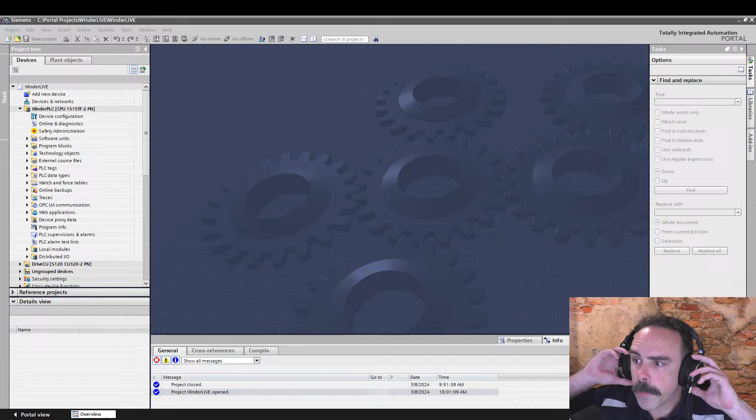So let's get going on TIA Portal. We're going to start with our project that we started a couple weeks ago, our Winder project, and use that as a jump off point. And my face is in the wrong place, there, that's a little better. So this is our Winder live project. We're going to start from this, and we're going to add in some technology objects.

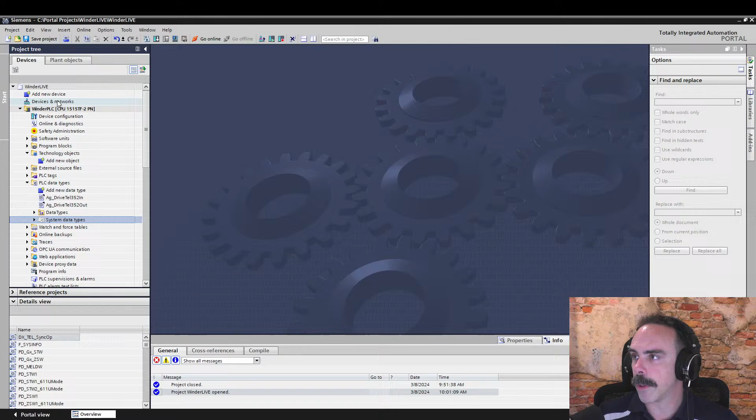Actually, first thing, let's just do this. Let's see if we can totally mess this up. I want to go to properties here, because I want to change these to servo, and then change these drive telegrams, because we're not really going to be using any of the stuff. This is just our free telegram, and 103 is not available, like I just talked about ad nauseum.

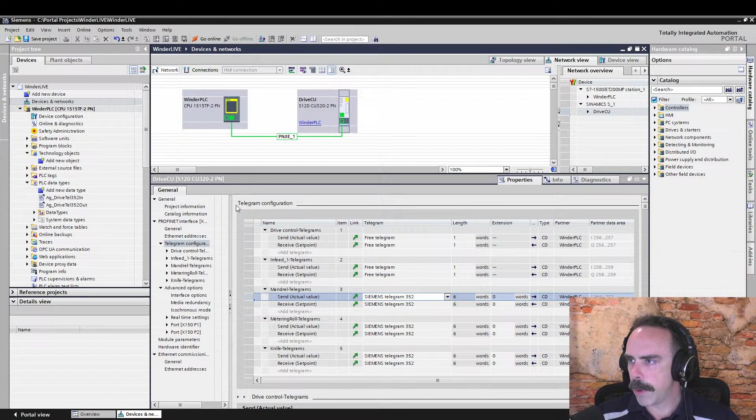So what we're going to do is go up to device view, and we have to go to these individual devices. So click in this grayed out area. The dark gray means it's fully configured. If it's light gray like this, it means there's something that's not quite configured.

So I'm going to change this to high dynamic servo for all of these, and it'll pop up this little dialog box that says it will delete all additional components and reset the parameters. So we're going to go through and real quick set this up all in servo. Now, one thing to note is that

Yeah, so measure, that's the thing, so measure twice, cut once. He's actually close to my heart. He's my replacement at Wesco.

So he is asking whether or not these data types are part of a Siemens library. They are actually built into Portal. You just have to know how to access them, and that's what we're going to do. Once you know the telegram that you're using, there's a certain thing that you can type in, and it just works. And it'll actually import them into these system data types here automatically.

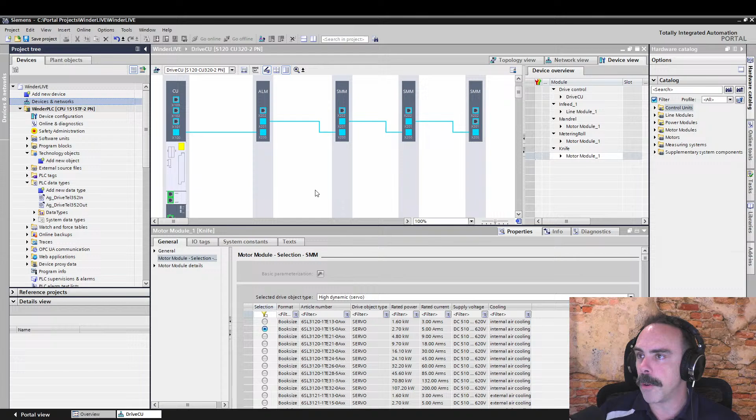So last thing I'm going to talk about is the hardware, then I'm just going to blow through this hardware real quick. These control units can control up to 6 vector or 6 servo drives. No matter what, 6 is kind of your limit. You can do 12 volts per hertz drives on them. But the problem is you can't mix and match servo and vector.

Save live. So not sure what the question is. Ali Reza. Is this the Ali Reza? Ali Reza Firouzja for all of you chess people out there.

Are you asking whether or not you can save what is online, kind of do an upload? If that's your question, yeah, we could talk about that.

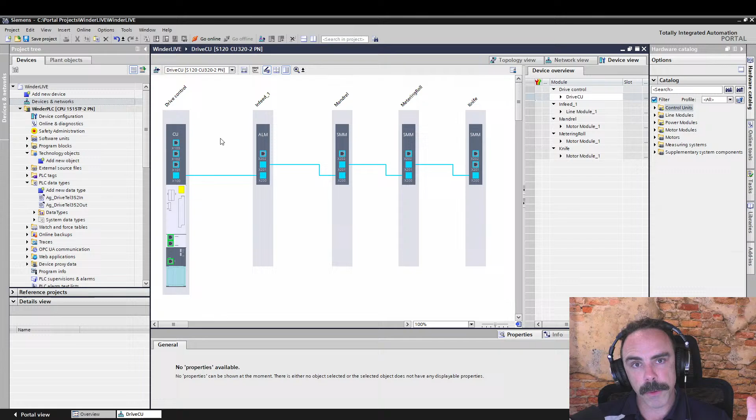But one thing I was wanting to say: mixing and matching servo and vector drives isn't allowed on a single control unit. So a single CU320 has to either be all servos or servo and volts per hertz, or all vector or vector and volts per hertz. So you can't mix servo and vector on one control unit. I have a project where we have multiple control units, and we put all of our servo control together. So anything that you want to use Telegram 103 needs to be in servo.

If you were wanting to do vector control, like for a standard BlackMax motor or something like that, you're going to absolutely have to have 2 control units just for that. Fortunately, in our situation, we had like 8 motors that we were running on this system anyway, and so we had 2 control units, and I put 6 servos on one, and then did everything else in vector control on the other. So just one thing to note.

Let's throw some motors in here. Ali Reza, if you're asking whether or not you can upload what is live on here, you can. There's a trick in Portal. If you are wanting to upload into Portal, say like the drive unit, everything has to be offline. So you could connect up to the PLC, connect up to the drive to make sure you have the connection, but then you have to click here and go offline on everything, make sure everything is offline, and then you can click this and click upload, and then that'll load.

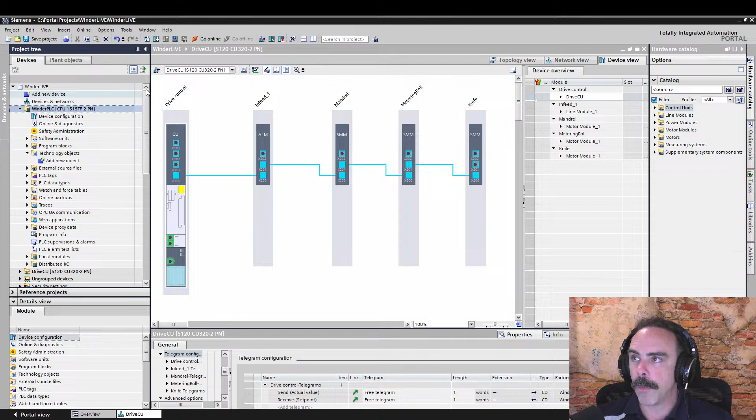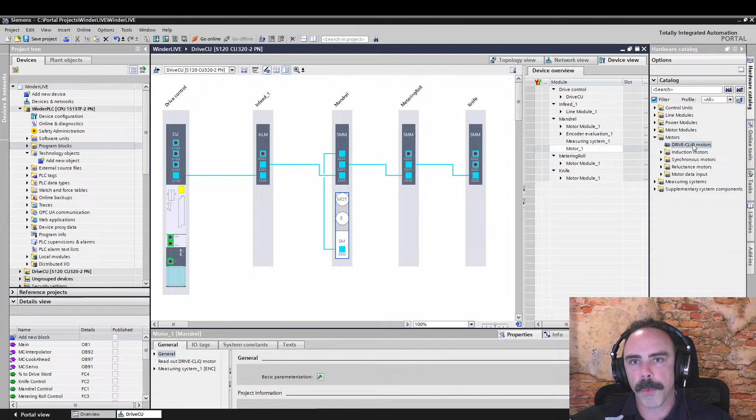Same thing with the PLC. You can upload your program blocks if you have the project, and it'll upload it off of that if upload is permitted in the project. If you've been on the stream a couple of times and you've seen me bring in a PLC, you'll see this dialog box that pops up asking, do you want to enable these protection settings? If the protection is made to where you can't do an upload, then you cannot save what is live on the PLC without a password.

There is the same protection on the S120 as well, but it's just a little bit deeper built in.

Hopefully that answers your question, and welcome to the stream, as always. And so, again, as you're coming in, if this is your first time, welcome. This is usually a pretty international crowd. So glad that most everywhere else is able to speak English. Sometimes I don't do it well either. Sometimes my redneck will come out. And if you're not familiar with what that is, it's okay. We in the south of the U.S.

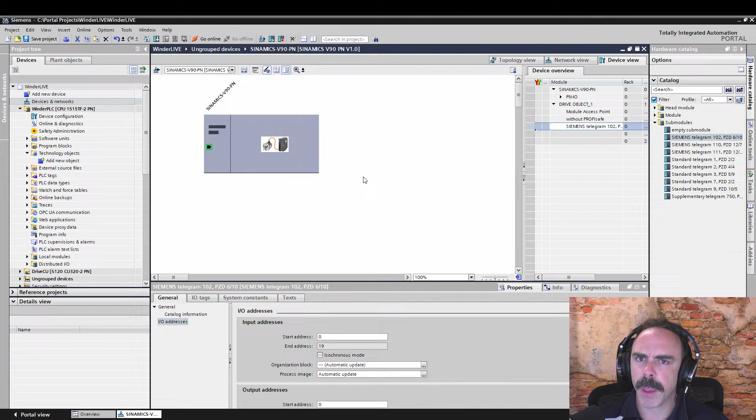Okay, so we can do a Siemens Telegram 102. Let's see if we can actually make this work, because this has a GSD file with these telegrams. So I might be winging myself into... yeah. We got some cool stuff coming.

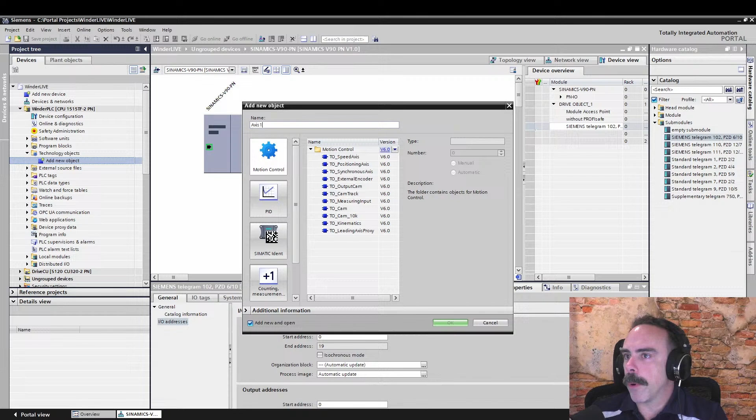So let's add a new technology object. Ultimately we're wanting to do a delta picker, and we're going to need positioning axes, because what we're going to get into today is having this kinematic technology object. In order to have kinematics, if you're not familiar with the way the technology object concept works, a technology object is a dedicated data block. Yeah, okay.

Yeah, so the technology object is a dedicated motion control resource on these PLCs. Your standard CPUs, like a regular 1500, can do what's called standard motion control, and those are speed axis, positioning axis, and even a synchronous axis. Those are the standard motion control. These camming kinematics require a technology CPU, so that's why we have this 1515T processor.

And the way this works is it creates a data block that your program interfaces into the technology object, and then you configure the technology object differently depending on what type of hardware is out there. So the program you write, as long as you have a technology object of the same type, it just works. And then you can reconfigure that output to either be a Siemens drive, a Siemens G120, S120, V90.

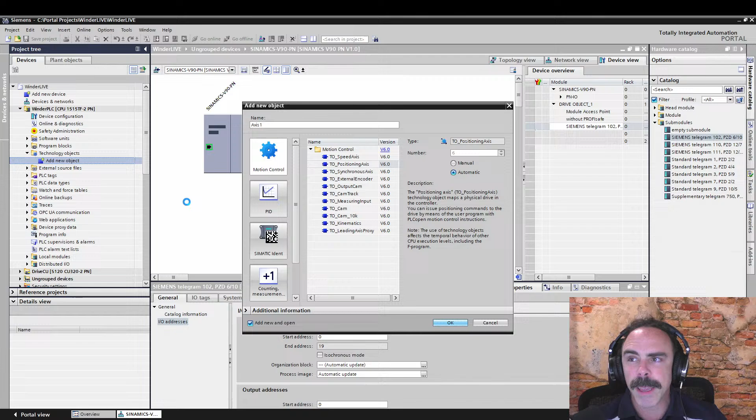So if you're not familiar with hydraulic motors, there are actuators and flow control valves for these hydraulic motors that are based on an analog output. Well, we can connect up this technology object to just send out an analog output and then bring back an encoder signal that we set up differently. So we're going to make 3 axes of positioning axis objects. So we're going to have 3 technology objects of the type positioning axis.

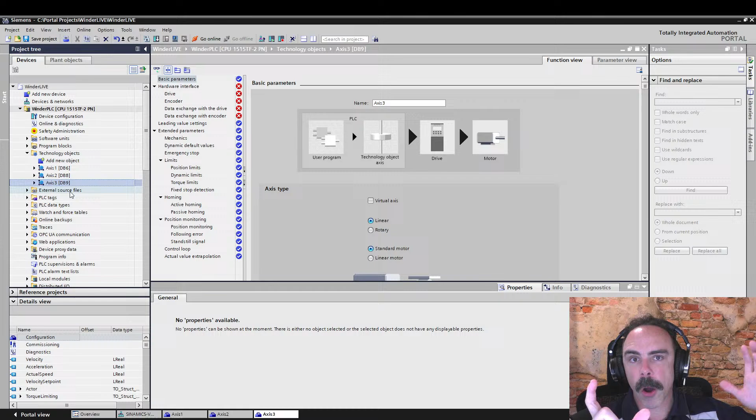And we'll get into this here in a second, because if you understand the concept of just your basic technology objects, the Kinematics technology object goes a step further. And instead of interfacing in with the drives, the Kinematics interfaces in with other technology objects. So it's like recursion inside of that. So you have to have these technology objects set up, which you can modify the hardware on, and then you can have this Kinematics object over the top of it.

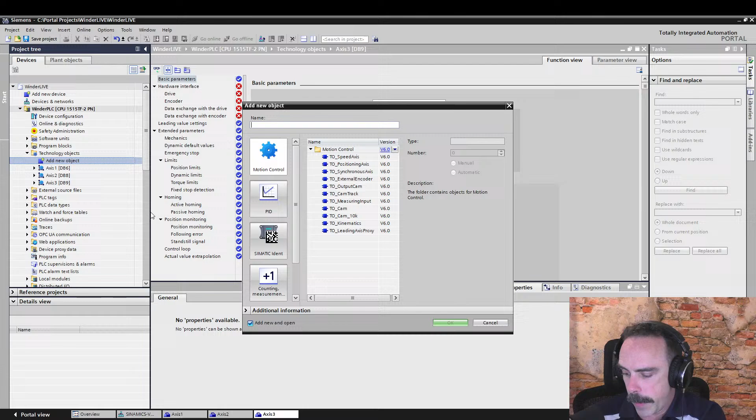And so you have three technology objects, and then you have this plugin, this kinematic, that operates all 3 of these. And so you're interfacing in with the kinematic technology object and then going from there. So the cool thing about it is, if you notice, I haven't configured any of the axis 1, 2, or 3, and delta TO. And I don't have to have these axes fully configured, I believe, to be able to do this.

And AliReza, that's a great suggestion. While this is loading in, it'll take a little bit. AliReza's asked for a video about making an induction motor look like a servo motor, and there's a couple of different things that are interesting about that thought. A servo motor, most people think of as a permanent magnet motor. Like, I think I have one sitting around here somewhere. Hold on.

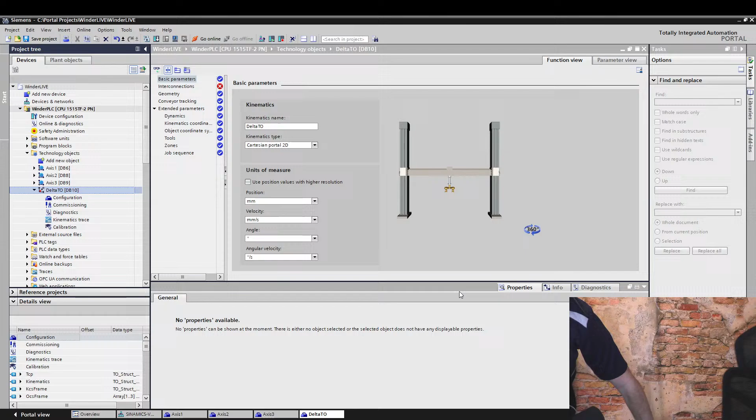So most people think that this is a servo motor, and it's a 1FK7 permanent magnet motor. So there are windings on the outside of this motor, and then permanent magnets on the actual rotor. So if we were to take this motor apart, there would be magnets on here. So this is what everybody calls a servo motor, right? Because this motor has to have servo control in order to run it.

Well, the thing about it, you can actually run an induction motor in servo control and get decent performance out of an induction motor. Not nearly the same performance as that servo motor, but you can run an induction motor in servo control as long as you have an encoder.

And so there are actually a couple of motors. You know how I said earlier that I had the system that had the 2 control units, and I had too many objects on one control unit, and I was kind of having to jumble them up. Well, a lot of those actually are induction motors. The winder that we've made is actually using 1PH8 motors, and they are induction motors. They don't have permanent magnets, so they're not servo motors, but they are running in servo control.

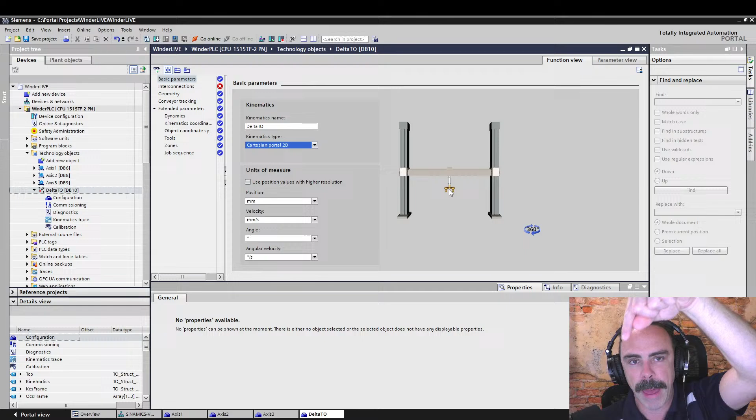So all you're sending to this technology object is the path in order to move. Then the technology object sends down the control to the other motors in order to make that happen. So you pick the mechanical type that we want. What we want is what's called a 3D delta picker. If you've never seen one of these, they're pretty stinking cool.

You have your 3 motors, and they are all in the same plane. So you have a flat plane, so you're not having to have an XYZ type setup. And all 3 motors don't move. Because of this, your end effector can have very low inertia, so you can move really fast and accelerate really fast. And we're going to be putting some of these together.

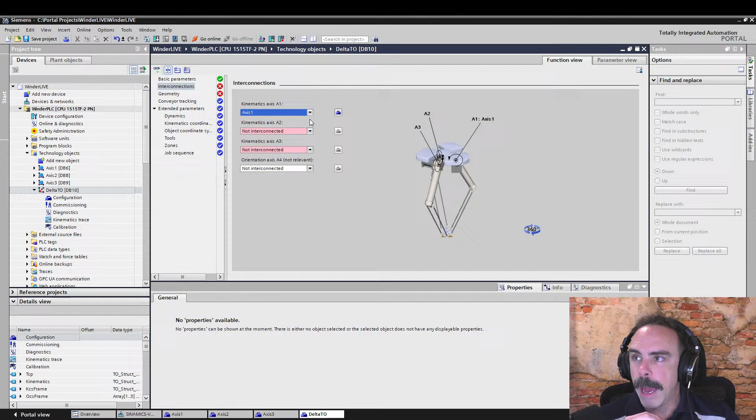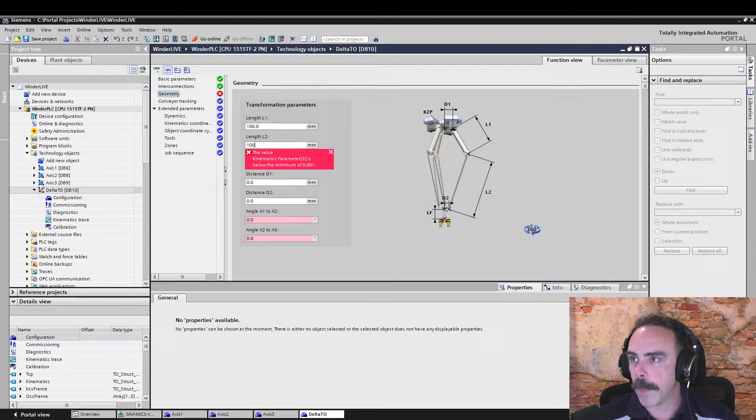So the next thing we're going to do is these interconnections. We want to interconnect axis 1, axis 2, and axis 3, and we're good to go. Green means go, right? The next thing you would do is go through each one of these geometries. The length of the arms, say they're 100 millimeters. Length 2 is the length of the second, bottom part of the arm. Say it's 100 millimeters.

Then you go through all of these other things here. So the distance from the center point of the device to the shaft center point, let's say that's 30 millimeters. And distance D2, let's say that's 15 or 10. It's really small, I know, but we're just putting these in. Our axis angles, we're going to say 120. Is that not right? Yeah, 120. So that's really all you have to set up.

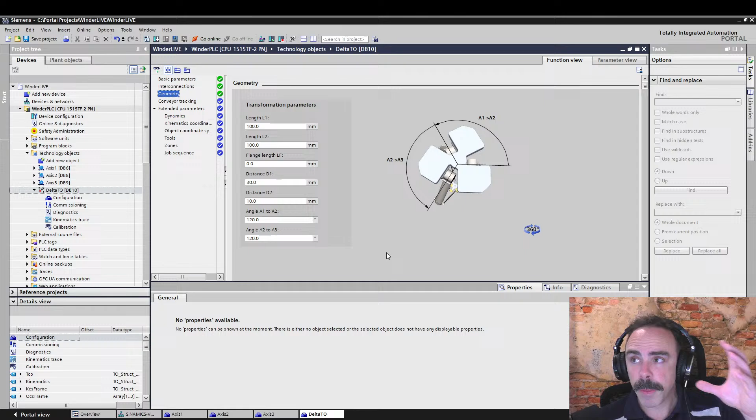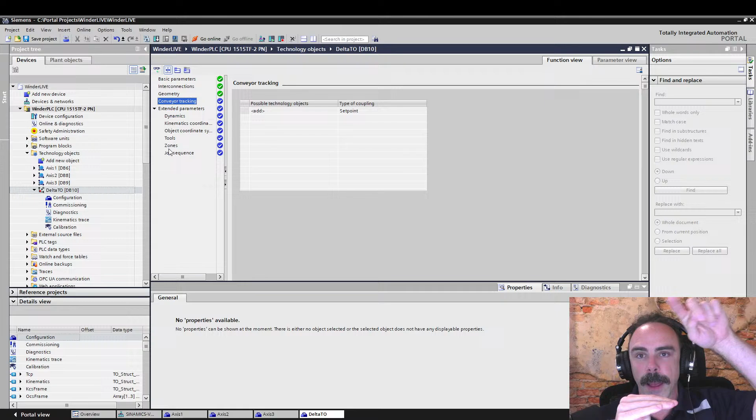And there's all sorts of cool stuff you could get from here, like conveyor tracking. If you have a positioning axis that is a conveyor, it can automatically take that end effector, and if you say go to a certain point, it will go to that point and automatically track according to that conveyor. Super cool. If you haven't seen videos of how fast these things can operate, you really need to look it up. The downside to this delta type picker is that the envelope of motion is really weird.

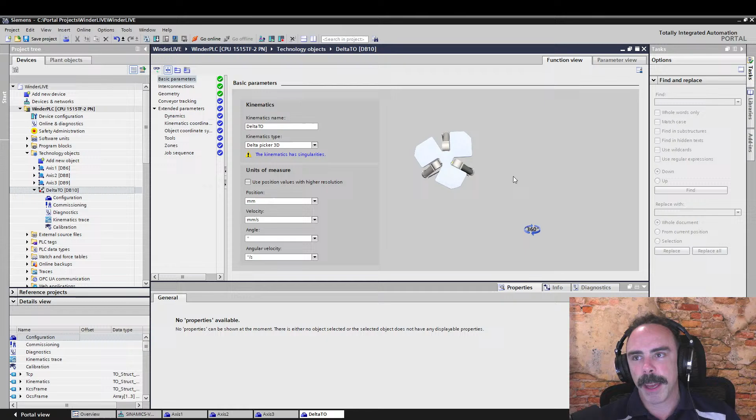Let's go back to this. If you're directly below this object, you can get the full extension away from this plane, right? Well, if you get off to the side, if you deflect over here somewhere, you can see how the arms have to work in order to do that, and it's very difficult for this configuration to get over here. So it creates this weird cone-shaped envelope that you can work in.

What it does really well is if you're at some level where these are close to parallel, it goes really well up a few inches and over. So it does really good at sorting between two conveyors, back and forth, and it can do it lightning fast. These are really cool, with built-in kinematics. So we've connected up our 3 axes. There's a lot about the kinematic objects, and we might talk about that in a little bit if we have time.

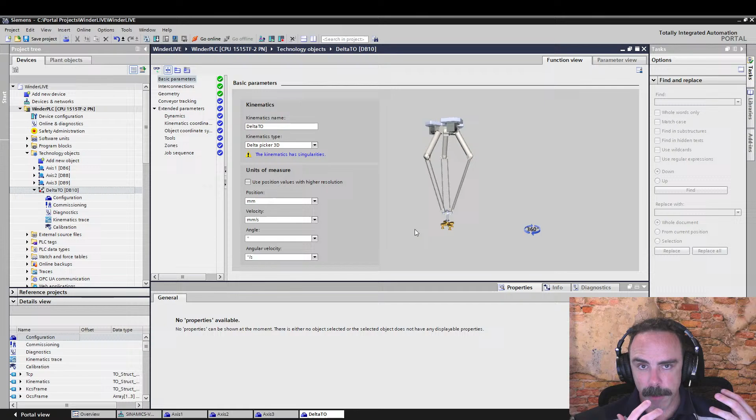But there's a whole set of MC instructions that are for the kinematic object. Instead of MC move absolute, you have things like MC move linear, and if you've ever worked with an actual robot company, again, like KUKA, FANUC, ABB, any of these industrial robots, you have these instructions that say, hey, how do you want the joints to move? Do you want the pin on the end of your end effector to move in a straight line, or do you want it to move in a circle? Like, do you want it to move around like this? How do you want that end effector to get from point A to point B? That's the type of instructions that you have for the kinematic object.

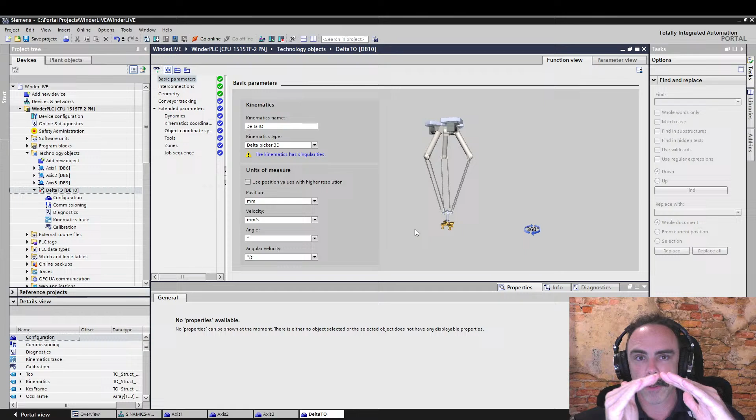Whereas you can get down into moving just one motor. But think about it. The complexity that's built up into this design of these three motors acting together and moving this endpoint around, up and down and all around, is pretty crazy. So, let's go through now and talk about the individual axes, because that's kind of where the crux of this conversation is. We've got 3 axes here. Let's configure one each of the 3 different ways that you configure an object.

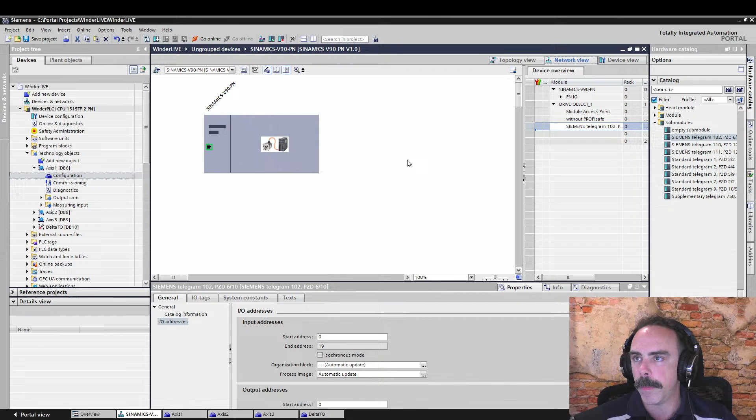So axis 1, it needs to be a linear, because all of these motions are going to be, actually, it converts it inside of it. So I guess it doesn't really matter, but linear just makes it a little bit easier. It is a standard motor. It's actually a rotary motor that's getting changed into a linear coordinate system. But we're really concerned about these drives. So the first one that we're going to set up is just one of these drives on the axis that's on this control unit. Obviously these aren't real setups, but we'll go from there.

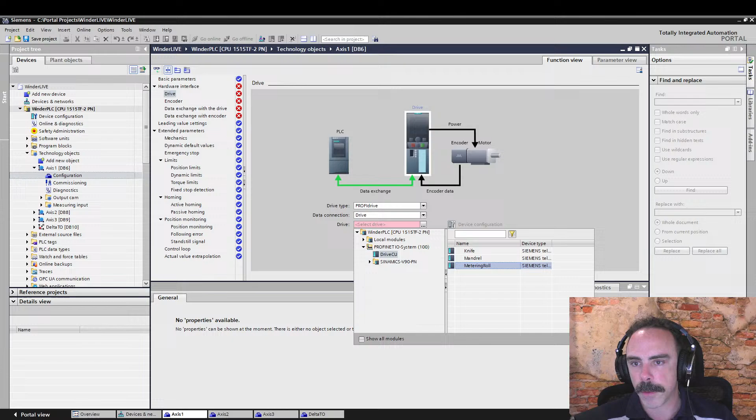So the first way that we can look at it is the data connection is from a drive, and we select, and this is the same thing we've done many times. We select, okay, here's this CU, here's this object, and let's just pick the metering roll. They're all positioning axes, and because that has a Siemens 102 telegram, it brings in everything. It knows, in that Siemens 102, there is encoder data built in. We're good to go. So that one is green. If this is the first time you're using technology objects, if you don't have any red, you were technically able to attempt to run the technology object, but things like position limits and dynamic limits might not be set right. So it might not run in a way that you expect.

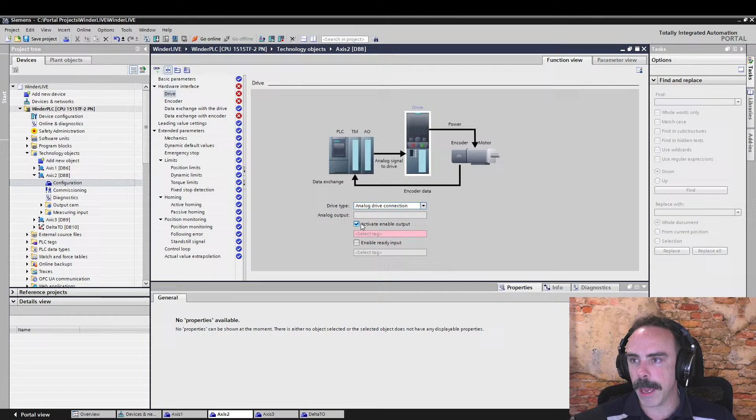So in order to do this, if you had just an analog controlled drive, like an older DC drive that doesn't even have Ethernet, or anything that doesn't have a PROFIdrive connection that shows up in a GSD file, let's just go in here and add in an analog card and see if we can do this. So rack, AQ.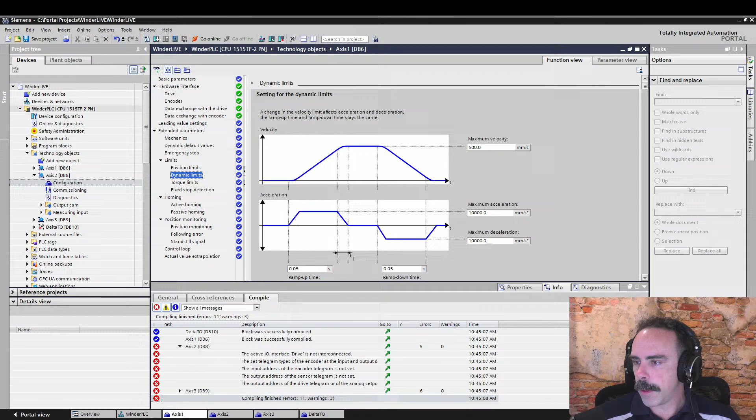And so, yeah, just trying to set up this axis 2, and we needed to try and get a... Active interface drive is not interconnected. Output address of the drive telegram or the analog set point is not set. Duh, I haven't done that yet. Okay. So, wasn't that simple. Let's do this.

So, as you can tell, this is live and unplanned. So it might be that this is not, no, that should work. So let's get the addresses here, and let's just do it. How about let's just do this? And make that. And now we should just be able to copy that into here. Ah, there it is. You just needed a tag.

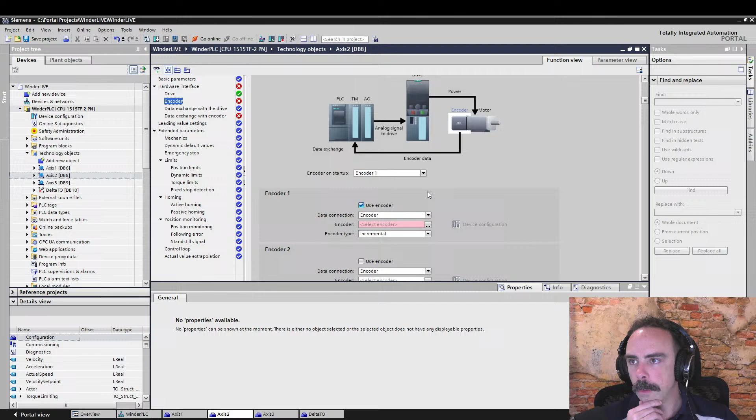So, all right. And then from our encoder connection, because we need some sort of feedback in, right? This is where we're going to have to figure out some sort of feedback coming back in. Because if you don't have an encoder, you got all sorts of issues. So we're going to use this, and we're going to come back to this in a minute, because you've got to have this data feedback. And so we're kind of running into this little problem here.

So the third type of connection. And by the way, I noticed on this Axis 1 here, when we were connecting up the drive, that I actually had an option for that Telegram 102 that we made, which is something new. It used to not be available for technology objects. So this is a great improvement for the V90.

And I know a lot of you guys out there are using V90s, and most of the time people use the V90 for the cost savings, but a lot of times you just need a small motor. And so I'm about to come into possession of a couple of these V90 motors. And so we might be setting up a kinematic, like an actual Delta picker, and I might just 3D print a Delta picker setup so we can really play with this stuff later. But yeah, so stay tuned.

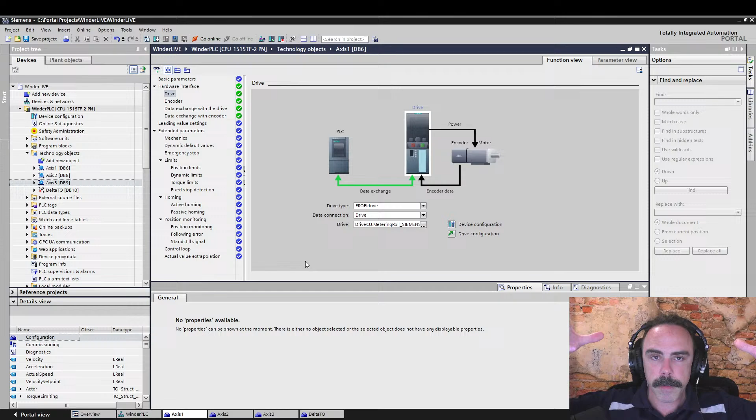But if you have this Modbus TCP data that you're sending out to the individual motors of, say, a Delta picker that you've bought, this physical rack that has these motors and these Modbus drives on it, and you're wanting to use the Siemens technology object, well, you're not able to bring the Modbus data into this network. With the V90, we were able to bring it into the PROFIdrive, so there's a telegram we can make available and tie into this technology object.

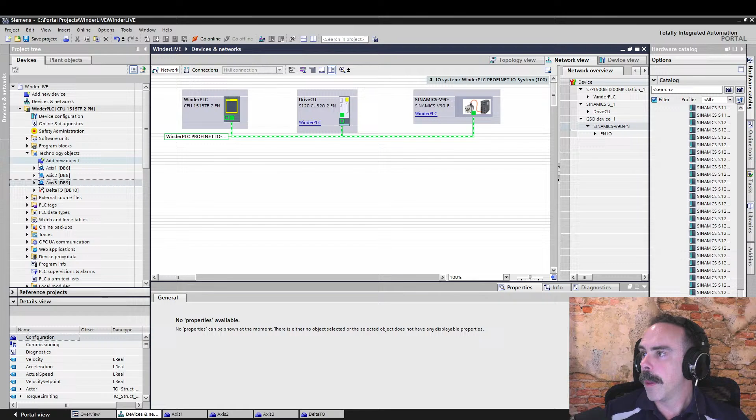Well, with Modbus, it won't be here. It won't be in this setup. It's just reaching out to an IP address, populating a data block. So what we're going to do is make a data block that's called Modbus drive data. Okay. All right. So we have this Modbus drive data, and there's a couple of different ways that we could do this.

And just so that you keep the cycles separated out, I would have two separate data blocks, and I'll show you what I mean. What we're going to be doing is bringing in the Modbus data into this data block. Then we are going to be transferring this into and creating essentially a Siemens Telegram 103. And then we are going to be using that fake 103 telegram in our technology object.

So what we're going to do first, because we need to set this up first, and I'm going to show you, and don't think that I'm some sort of genius or whatever. There is literally a document for this. It is the motion control manual. So 1500T motion control overview function manual, English US. So I'll send the link to where you can find this.

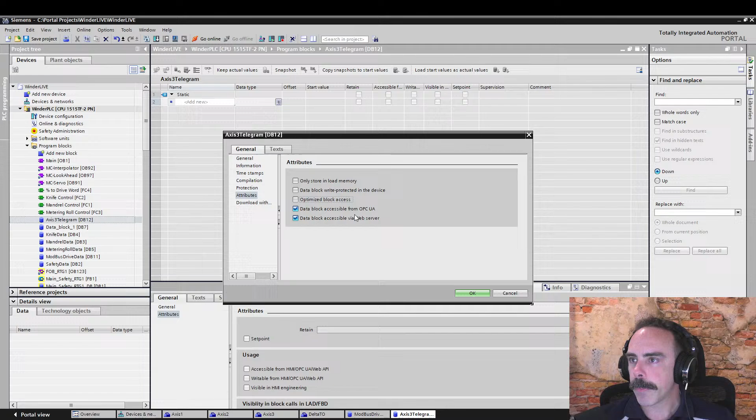And a couple of things that it said that we needed to do. We needed to right click on it, go to properties, make sure this is unchecked, and uncheck optimize block access. So that was what this document says here: disable the following attributes: write protected device, optimize block access, only store in load memory. So these top three we need to unselect, say okay, and that makes it to where we are able to actually connect and create what we're about to create.

So the next thing that it says is on the add new tag. This is the cool little thing. This is what Measure was talking about earlier, about having these telegrams built into TIA Portal. When you enter the new tag, you just type in PD_TEL103 and hit enter. It won't show up anything. You're an advanced Siemens programmer, an advanced motion control programmer, and so it recognizes your superior ability and it loads it in for you. Because otherwise I would have no idea how to get it.

So we're just going to name this Axis 3 Telegram. And in the type, we are going to do PD_TEL103, and of course I already have it in there from before, but we click enter. If you didn't have it in there, that little pop-up box wouldn't have shown up. It would have just been like, trust me, bro, I know what it is. And there we go. We have our telegram now here.

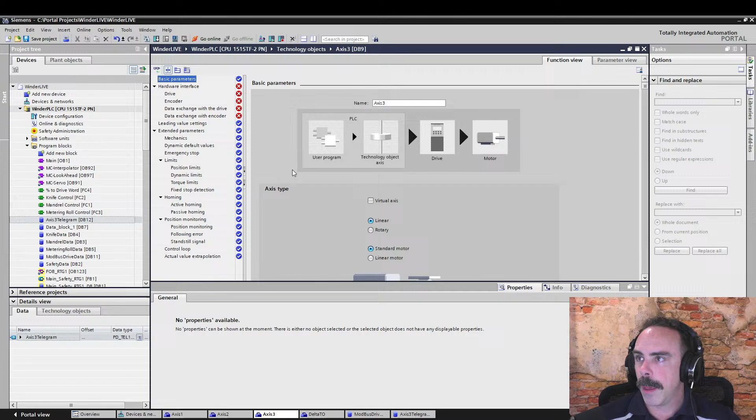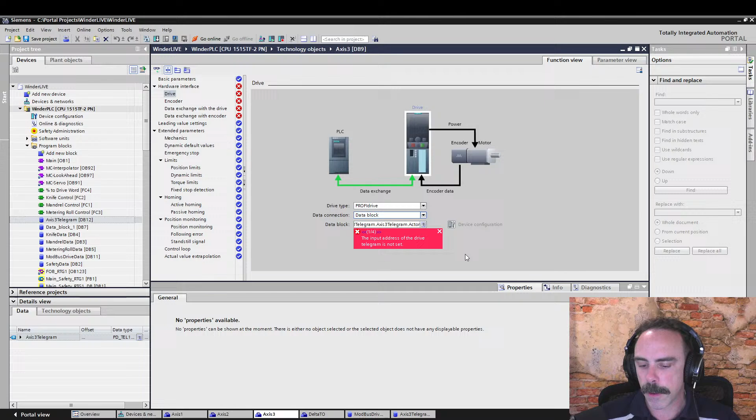So what we can do now is go to Axis 3, and on our drive, we can go PROFIdrive. Data connection is Datablock, because it's still treating it like a PROFIdrive, like a telegram. And then we're going to select our Axis 3 telegram. And there's our telegram. And it doesn't work. What the crap? Oh, that's right.

Remember talking earlier about having to compile a bunch of stuff all the time? So just do a hardware rebuild all, and then a software rebuild all. Where I'm clicking is underneath on the actual PLC itself, right clicking, and going down to compile hardware and software only changes. Sometimes that doesn't catch stuff. Don't ask me why, but just do both of the rebuild alls, and that forces a rebuild.

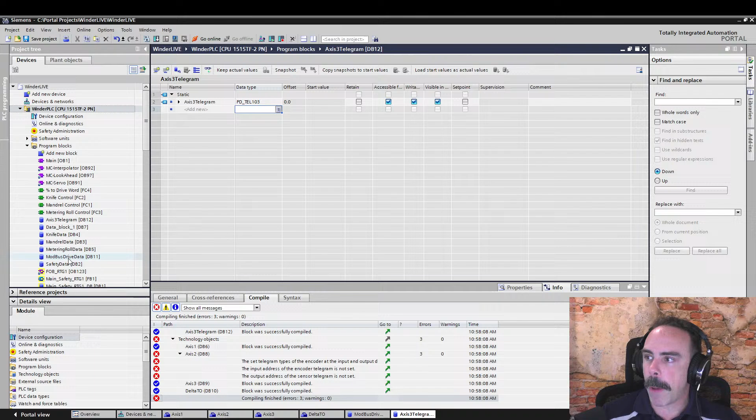And you'll notice here, my drive and encoder in my technology object are happy, right? They are accepting this configuration. But we know that Axis 3 telegram isn't getting populated by anything. It's just a placeholder sitting there. The data from Modbus is really coming in at this Modbus drive data. And so what we would want to do is have part of our program take our Modbus data from our Modbus TCP client and populate this.

We would want to do this. So we would say Modbus telegram. Okay. And we would want to have this same PD_TEL103, right? We would want to have that.

And the reason why I said that you wouldn't necessarily want to have these in the same thing is because you might want some other data here, right? Like you might be bringing in other stuff like statuses. You might have some calculation. You might have whatever. I mean, anything. So you might have all this stuff that you're wanting,

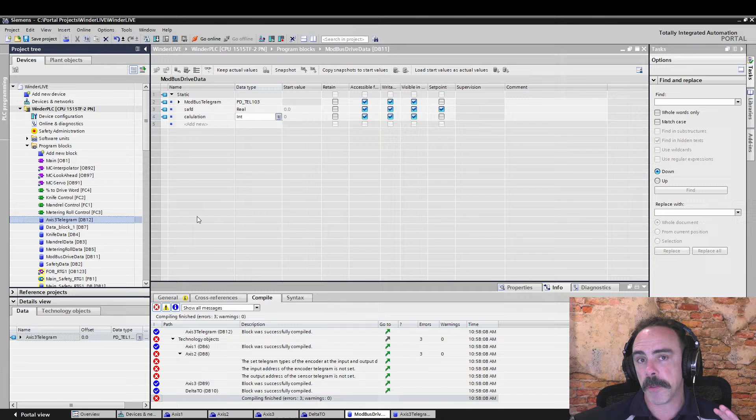but you are wanting to have this clear Axis 3 telegram block that is set up specifically to connect into this drive object or a technology object. And so now what you would do is you would go through and populate this telegram. So the input, what's coming in, make sure everything meets the standards. So a lot of this stuff is probably already there.

The big difference though is going to be this stuff here. So the XIST1 and XIST2, those are the instantaneous positions. And so that's the encoder data. And this actually has two encoders in the 103, but fortunately for you, you don't need this second. So if you only have one encoder, you don't have to populate the second one,

or you can just populate them the same. So you're going to go through and get your Modbus data, and then you're going to do whatever it takes to jam it all into these input and output telegrams. Okay. And this is the interface that your Modbus client is going to be working and populating this data block. Now, how do we get that into that other telegram?

And there's a very specific way that we are going to have to do this, because if you're not familiar with the technology objects, every function and everything that's working in the technology object, so all of your MC_Home, MC_Power, MC_Reset, MC moves, all the MC blocks, are actually being analyzed in what is called MC-Servo. So OB91. And how often OB91 gets updated is your motion control update time. Out of the box, most of the time it's like 2 milliseconds, which is crazy fast for most stuff. And it's an interrupt.

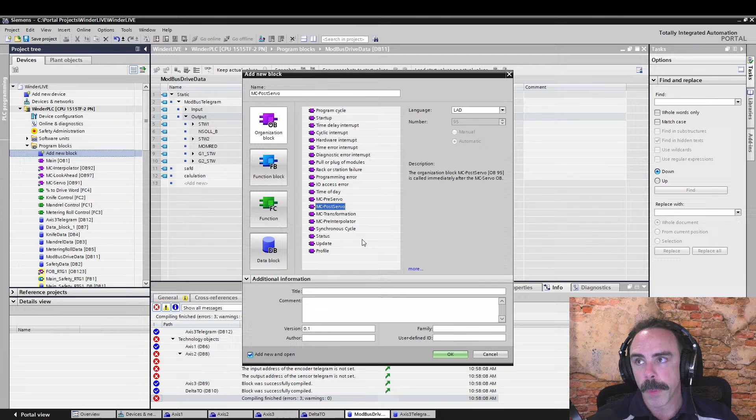So in order to correct for this, there are 2 organizational blocks, and we're going to add them in. They are called MC, so motion control, MC-PreServo and MC-PostServo. And we're going to add in both of these, and you can probably guess their purpose just by the name. But when we add these into our program, it gives us the ability to do a calculation where you are guaranteeing that that action will be performed before the MC-Servo cycle happens.

So what will happen if you have MC-PostServo and MC-PreServo loaded into your program? Every servo cycle, it will run MC-PreServo, then run MC-Servo, which is all of your MC commands, and then after that, it will run MC-PostServo based on what was just done. So that means all of those data blocks, everything that gets updated in your motion control, gets updated before post-servo, and your pre-servo is guaranteed to update it.

So here's what we want to do. We're looking at MC-PreServo, and again, we're just going to do a move, and we're going to move this Modbus drive data.

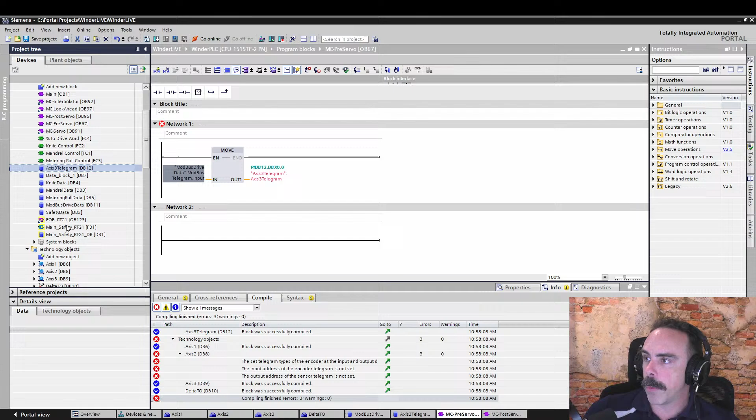And so let's go to Modbus drive data. Let's go to the Modbus telegram, and we only need to move the input, okay? And this should not like this because it's not the same size. And so this is just the input that we're going to transfer from the Modbus data into the actual Axis telegram data. So let's go here, and now we want to transfer that into the input. So there, now everything's happy.

Get in, get out. That's the rule with interrupts. Get in, get out. Don't spend any more time than you have to in there. And that's all that we have to do here. So let's go to MC post servo, and we're going to do the same thing. We're going to do a move, except we're going to move the outputs out now. So we go ahead and throw this into the output. So this is the Axis 3 Telegram output. And am I doing that backwards? Yep, I am. Remember the direction.

So we've got all of this stuff that is inside MC servo that's happening. And what's getting updated? Well, it is taking the input information, like encoder feedback, actual speed, drive status, stuff like that. It's bringing all that in. It's processing stuff inside of there. And then it's sending stuff out. So MC servo is updating the outputs, and now we want to send the outputs into our Modbus data block. And so that's why we're doing it in this order.

Yeah, and I don't know anywhere else where this has been put together on the internet. It took quite a while when I first did this topic to dig out this information, and it's a little bit dangerous information, so be very careful with what you're doing here. But it opens up an incredible world.

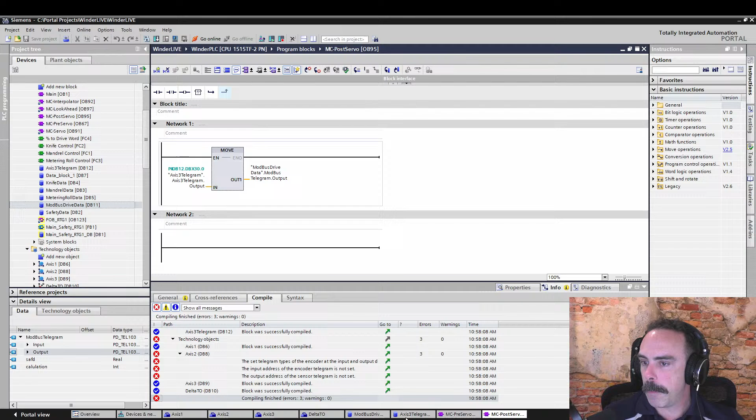Now, when you look at this stuff, let's look at this Modbus drive data, for example, the input data. We click into this and you can see, okay, speed deviation. Some of this stuff you can just put in there. A lot of this stuff is just speed comparison value reached, exceeded. There's a lot of stuff that may already be available in your drive. And then some of the stuff, like fault, operation enable, ready to operate, ready to switch on, you may just have to build up in this telegram.

The most difficult thing by far is going to be this X instantaneous 1 and 2, so your encoder feedback data. Fortunately, there's a document right there. Simple, right? Here is the definition for these encoder values. And so let me give you the entry ID again. I'll throw this over into chat, and search this number in SIOS, the Siemens Industry Online Support website, and you will get this document.

And again, you're not here because you're doing the simple thing. This is a very complicated thing, okay? And so this is some of the most high-end type of programming and stuff that you could do on these Siemens drives, and you really need to know about the hardware.

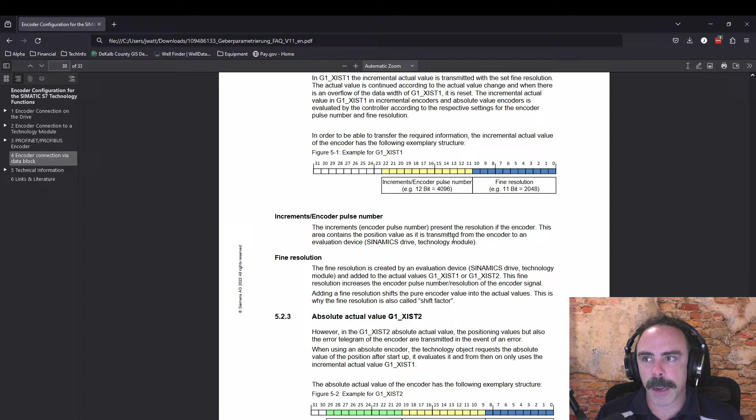So here's what you're doing. It's a little bit outside of the scope of what we're actually doing here. But I will say, this is an incremental value for X instantaneous. It tells you the definition of it. Here is the absolute value for X instantaneous. So this is that X instantaneous 2, right? So let's hop back over here, and we've got this X instantaneous 1 and X instantaneous 2. So that's the incremental value and the absolute value.

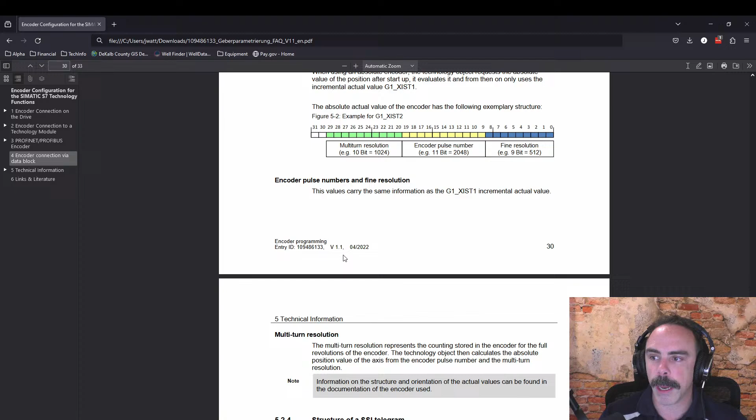So a little difficult and a little bit outside of what we are doing here. And if you're getting into something like this, then you're going to need to know, hey, this is tough. Probably though, because these values are in a standard telegram, it's probably already done for you, and you just have to find the right place to get the data. So hopefully that's the case. But here's the definition of that X instantaneous 1 and X instantaneous 2. And really, that is about it.

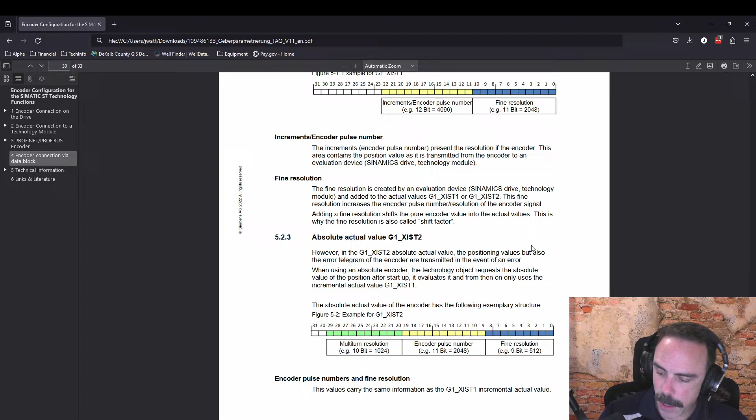So how y'all doing? How's everybody doing? Lost almost everyone. Yeah, this is the deep stuff. We're about to get into the HMI stuff that's a lot more accessible to people. But for those that have been hanging on into this topic, congratulations. For real, you should be proud, because this hurts my head, and it's taken me many years of my head hurting to be able to even talk like I know what I'm doing. But honestly, the only way that you can know about what data is available is to try it out.

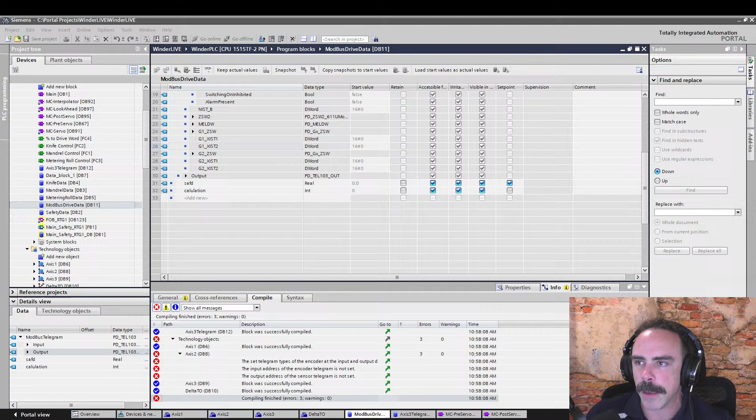For those that are still on, we're going to relax our brain. We're going to unwind a little bit. But I will say, I'm going to close all this stuff.

And again, MC pre-servo, MC post-servo, if you're working in those, just be sure to be efficient. Don't do anything in an organizational block that's extra stuff. So even in a cyclic interrupt, that you're running every 100 milliseconds or so, you can run a PID block and stuff in those. Sure, that's fine. Be sure that you don't get those update times too low, because especially if you're using MC Servo, you can start interrupting interrupts, and it works about as well as it sounds like it would.

There is a way that you can set your system up to where OB1 just doesn't run. Interrupts are interrupting interrupts, and then it never is able to actually complete the original interrupts, and your cycle execution stops, and all you're doing is just running interrupts. Now, you might want to design your system like that. Well, I don't know why you would want to, but you don't have to do things in OB1.

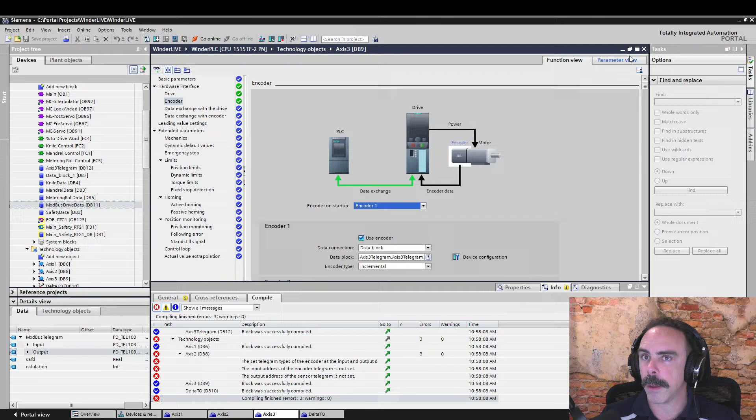I was talking to a customer that was having these issues with cycle times that they were seeing as being a little long. For what they were using in OB1, it might not be a problem, because everything important was pretty much being done in cyclic blocks. So they were either motion control or technology objects, but they were being done every 4 milliseconds. So in actuality, all their calculations were being updated every 4 milliseconds.

So we are transitioning now into our HMI topics. Last week we brought in our little Balluff sensor. It wasn't on this project, it was on a different project, but I'm just going to add in an HMI on here. Oh, I'm already there. So hardware catalog, I'm already there. So let's add in a comfort panel. Let's say 15-inch. We got some of these in the shop.

6AV2 124-0QC. No. Anyway, we're gonna throw one of these in here. The reason I'm doing this is so we can talk about scripting. I'm using a comfort panel just so we don't get restricted by something that I don't know about. Let's do our live HMI, right? And I don't know which one these are. Which one is this? Ethernet. I think they're both fine.

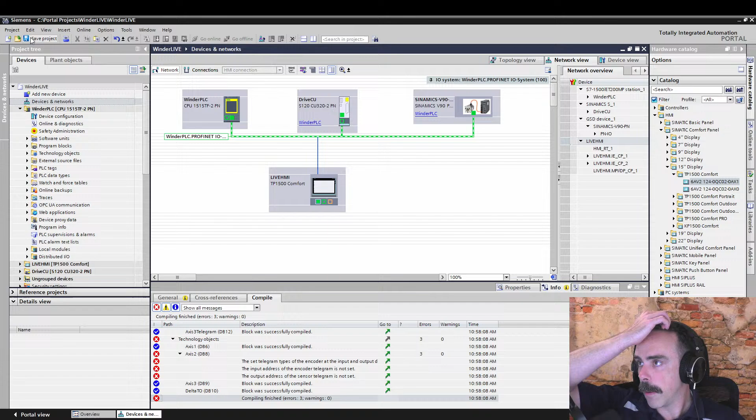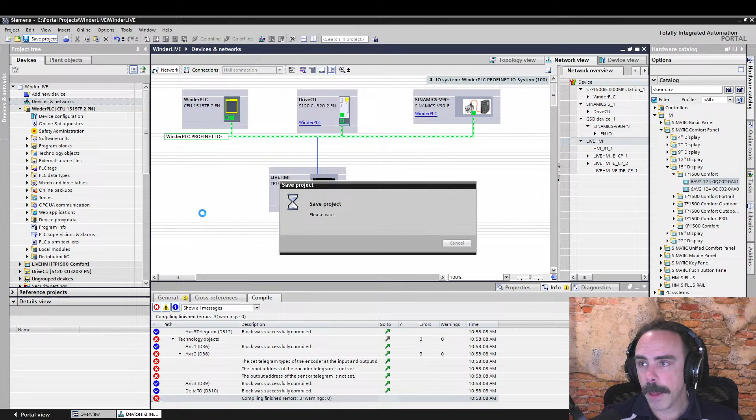So on the 15-inch, you have multiple interfaces, X1 and X2. Let's just connect this up, because we need to have a connection back to the device. So when we pull in tags, it makes the tags. Anytime you add in HMIs, saves get slow. So what we're going to do is introduce the concept of scripting. So let's just make a screen, and we're going to name it main screen. Rename. My microphone's blocking it. So real simple stuff.

One of the things about creating scripts is there's a couple of concepts. Scripts have to be called. On a comfort panel, the only scripting option you have is VB script. But if you're using another SCADA platform like WinCC Professional or WinCC 7.x, in those you could do C scripting, so you can use different languages. For this, it's VB, and if you're not familiar with VB, if you've ever run Excel, it's pretty much Excel. You just get access to some different functions, and we're going to go through some of those basic functions today.

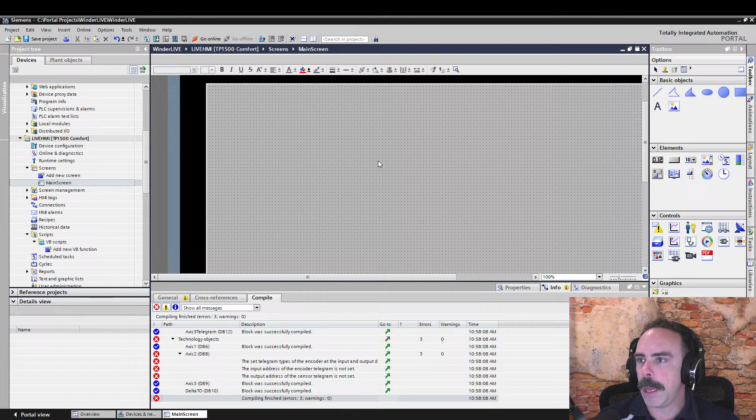So the first thing we're going to do is go through and show you the basics about the core function of a script. Remember, you have to activate a script, so it's not quite like a full program. The easiest way to activate a script is clicking on this and going to properties, events, and there's a loaded and a cleared event. So whenever this main screen is loaded, you can tie a function, which we can tie a script to.

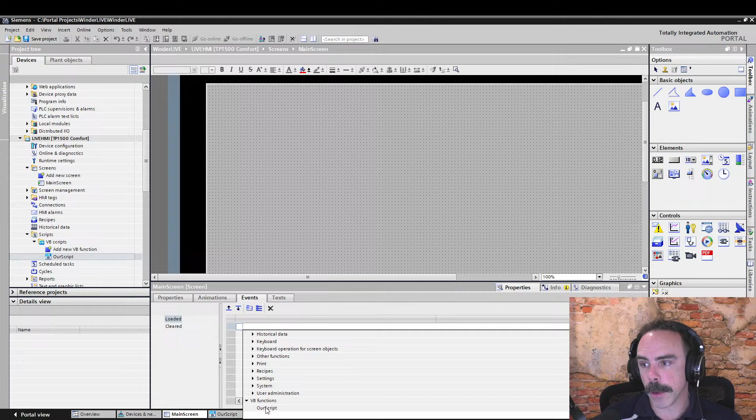So let's add in a new VB script, and let's just call it our script. If you notice now, we could go in here and we have VB functions, our script. So now when this page is loaded, it will run once through this function. Now, this is pretty simple. This isn't going to be a programming class per se. It's just introducing you to the core concepts of how to use VB scripts in Comfort Panel, because there are things that are specific to the scripting language, how to gain access to tags and properties, and that's what we're going to go through today.

So if you're not familiar with it, because this is VB, dim my... Dim is just a variable, and in VB, instead of actually defining the type of your variable, it defines the type when it first gets used. So you declare a dim. This is a variable inside this script only. And there are ways that you can create variables outside of it, and that's through global tags.

And so the only way that you can share data in between scripts is through global tags, because there's no environment that this is running in. Now, I will say, I may be wrong on that. There might be a way, and if you know a way to do this, feel free to chime in. And so what we're going to do here is just talk about the basics.

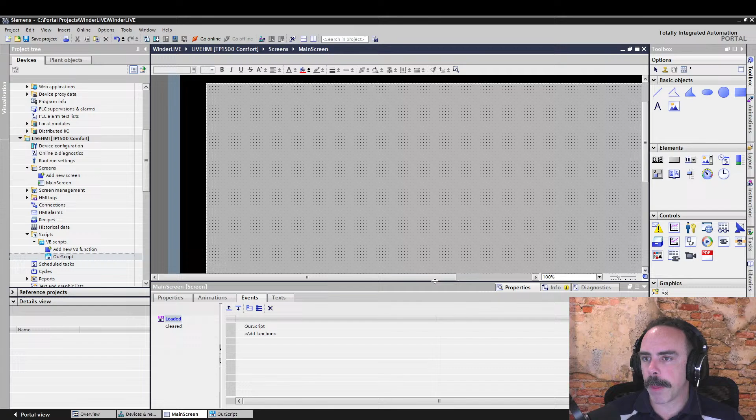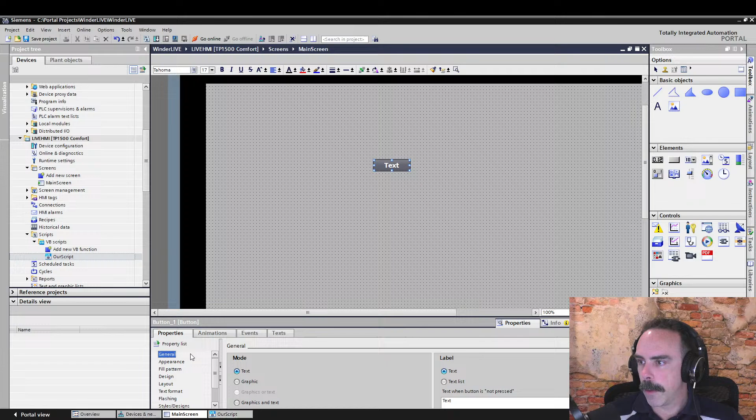So I've defined this variable, my object. Now, say I'm wanting to do something like, I have a box here, or this is a button, right? So you have your objects, you have your elements, so let's have this button here. And this button, we're going to call, not that, not what I wanted. Well, we'll just do it this way. So we have this button 1 right now, okay?

And I won't modify the name. But if we wanted to, for example, burrow into and change the properties of this button, say we want to move the position of this button dynamically for some reason, we can do that by using what is called this HMI runtime, and then we'll have these little objects. Now, you'll see me looking over to this side because I have a little bit of help. Again, I don't use this sort of stuff very often, and this is very rudimentary.

But I want to introduce you to two topics. One is how to gain access to the properties of an object on the screen, and then how to access tags. That is the basic core functions you want, so that you can do some math and then change a tag. That will get you to where you can do that. So an object on the screen, if you want to bring in this object, you want to use the set command, and then you want my object.

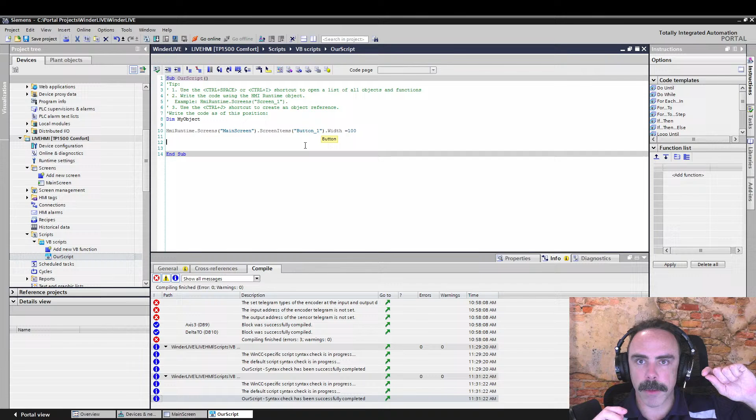Yep. Because this is pulling out this object, and you are changing the width of that button 1 to 100 without even using this my object. So that's two different ways of doing the same thing. Now, why would you want to do that? You could make this dynamic based on, say, a screen tag. So how do you get access to the tag though?

It is with a function called smart tags. And if you notice, for some reason mine is going gray. In my example, it's a burgundy color, but gray is these system functions that are available to you. So smart tags, and now I would put a tag in, but I don't have any HMI tags. So let's just make a tag here. Okay.

And so now you would want to make a tag that is in our tag table. You'd want to link it. So there's a manual way of doing this. Let's see if we can figure out the automatic way. So we're going to open up our default tag table. Now I'm going to go back and click on that.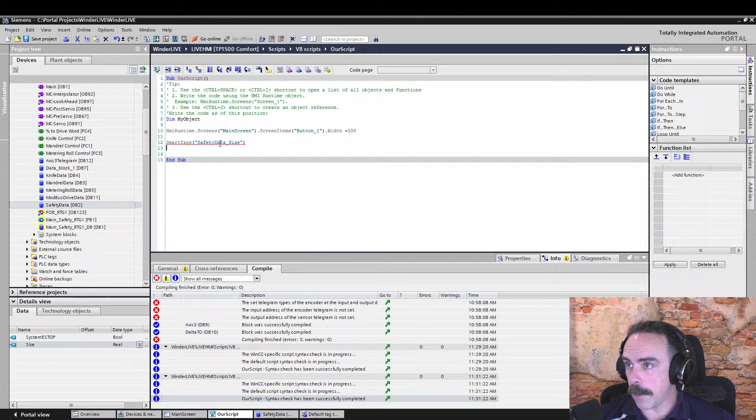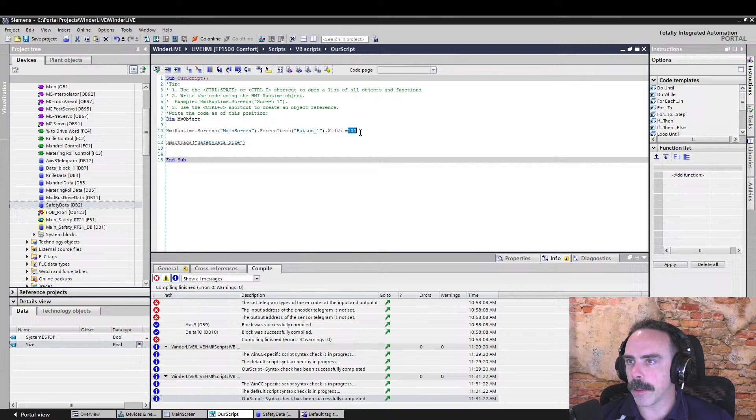Okay. That might not work, but we're going to cut and paste that, and we're going to go back into our script. We're going to put that here, and it does not like that because it has to be in quotes. And we're going to close that out, and it's not doing anything with it. So we want, say for example, to take this, and instead of this being a fixed value, we want this to be up here, right? And it likes it.

So what is that doing? What did I just show you how to do? We have made on our screen this little button here, okay? And inside of this button, there is a property in the layout, I believe, called width. It specifies the object width, and we can change these things. So this is position and size, and we can change that dynamically.

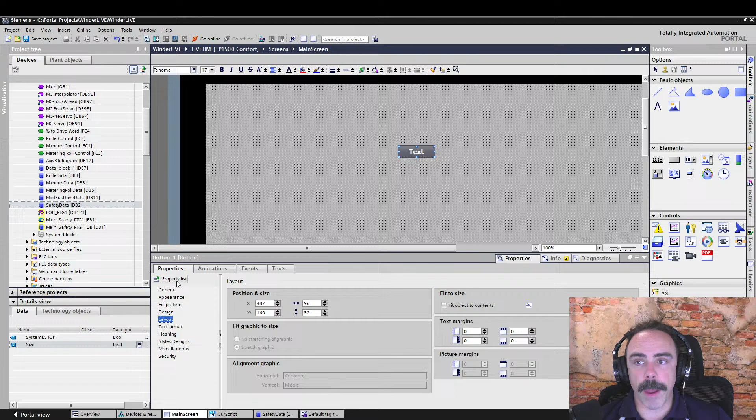Another way that you can look at the properties that are available for an object are on this property list, and you probably saw where I clicked that. Here's all of the different things. So width is there, there's height, and if you go into your script, with a dot, it will give you all of the available options that you can modify. Like vertical alignment, text on, text off, you could change all sorts of stuff via these scripts.

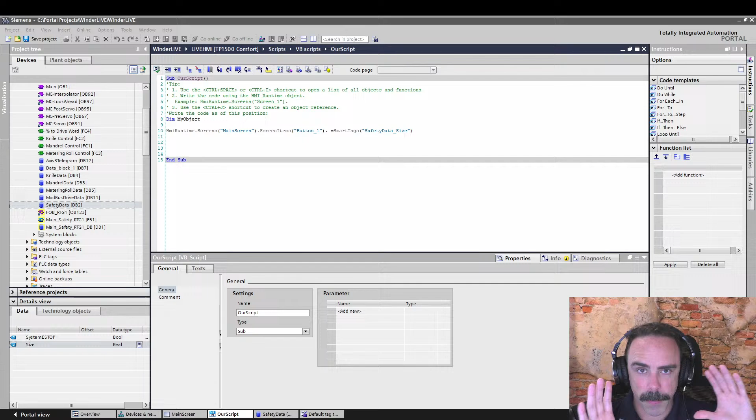And unless I have a very specific, hey, here's what I'm trying to do, you're really just going to have to build on that. So that's really the basic structure of how to access something on the screen. So you go HMI runtime, screen, again, it has to be in double quotes. You put the actual screen name in, you put the actual object that you're wanting, which I skipped over a second ago. Down at the bottom under miscellaneous is the actual object.

So like this. Now I will show you something in your script. I don't think it actually, oh, never mind. I'm a liar. It updated it for you. I was going to say it won't update it and then you could get hung up, but actually, it did. So my main screen, my button, and then you can set it using the smart tags to equal this.

Now, remember, my object, we said it's an object, but if you say set my object, it does not like this. Let me do this. Dot width. Just put it to something because otherwise that'll complain. So set is a method of the HMI screens, I guess it's screen items. Yeah. So the set method is part of this screen items thing here.

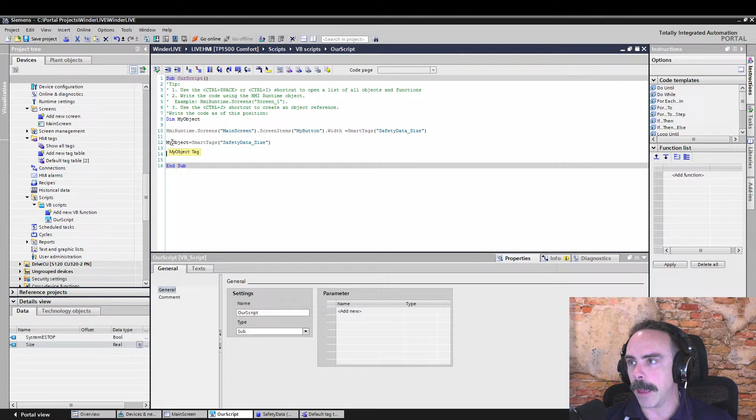So let's see. So my object equals, let's just do this smart tags here. Let's see if that works. That should be fine. So now this calls this as a tag, and it just sets my object equal to whatever that tag is. And so now at this point, you can go my object equals my object plus 1, and it's okay with that. So that would just increment whatever that value is.

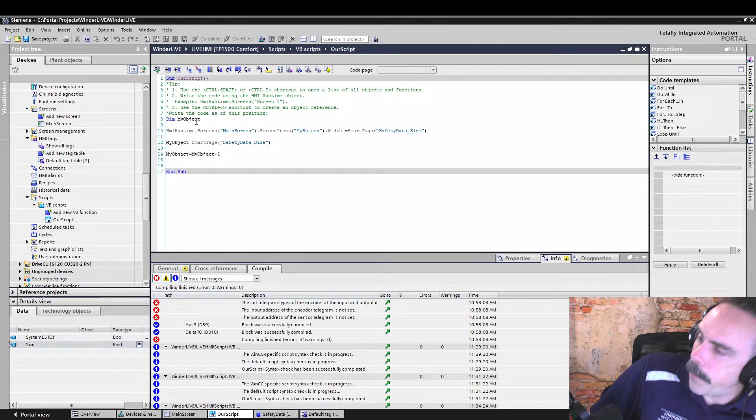And the crazy thing to me is you don't have to declare your variables. You just use dim, and that's a VB thing. And honestly, this is what makes Excel so powerful, is that you can do this sort of scripting. Now, probably the last thing that I'm going to talk about on this is how to call these things.

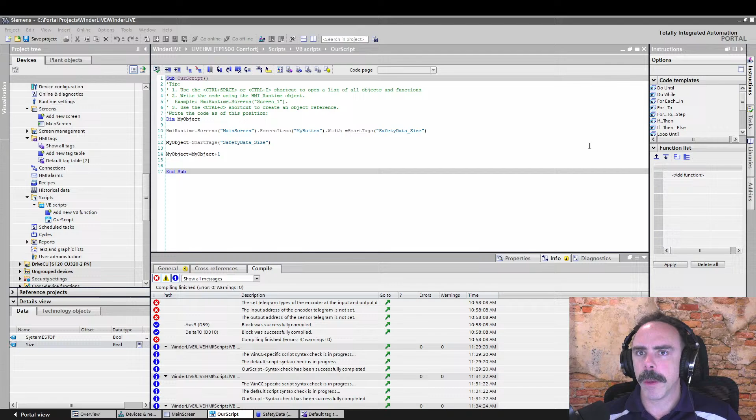Okay, so we've talked about on a screen load, right? Well, once you have this script, the thing about it is you can set up a script to where it runs indefinitely. So you can set up in here like a do while, right? Or, yeah, so a while. So you can literally do while true, and this will run forever, right?

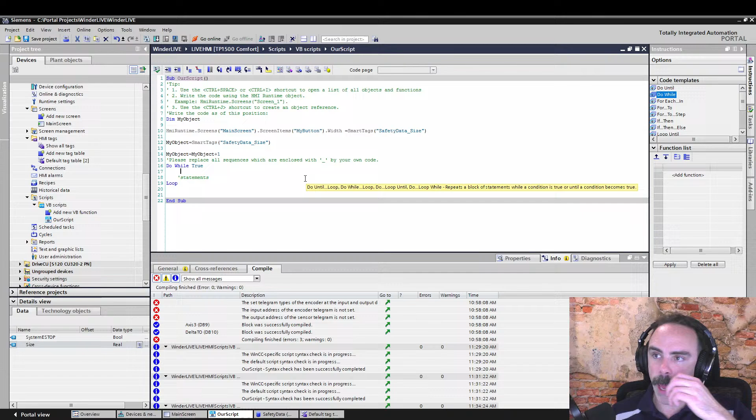One of the things that I talked about maybe doing last week, but we're coming up on about 2 hours now, or an hour and 45 minutes, was logging in and logging out of user administration. And so there is a function in here where you can set the user admin and password. So let's find it. I think it's log on. Yeah, log on right here. And then I think it will show it if you click F1 on it, maybe not.

So this function, oh, it's this up here. This little button here displays information about the parameter. And so the log on takes password and then username in terms of tags. And so you can pull these using the smart tags. So this would be log on, then we could use that smart tags thing to pull in a tag, or if we've already made our tag somehow, we could go in and do this.

And so remember last week, we had our Balluff sensor with our little RFID tags and a tag reader. There are some software packages that tie this into Windows logon servers and all of these IT kind of programs that are kind of complicated. There are paid software packages that you can load onto your HMIs that access all of this stuff. But with this logon function, you access a password and a username from your HMI user administration.

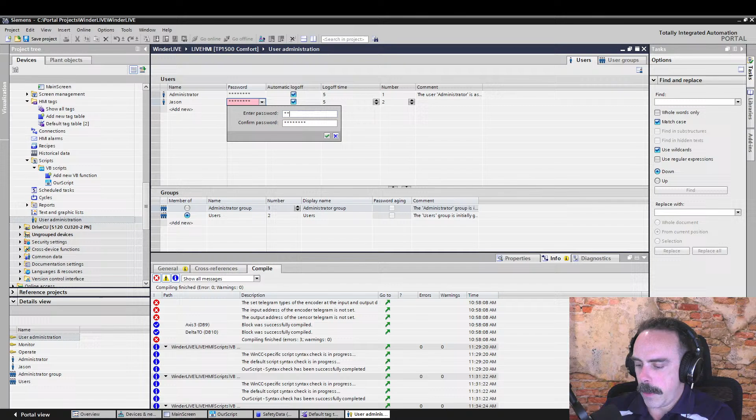So we go to user administration and you can set up these users. And so it can be whatever, Jason. And then the password is whatever. Not the word password. And so you can set this up like this.

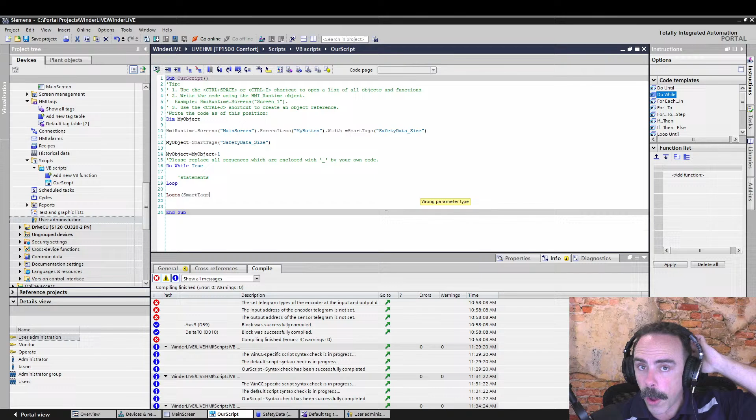And so maybe next time we'll go in and actually set up user administration to interface with that Balluff and create a protected user list that has usernames and passwords associated with these cards. So you associate the card on your PLC, and then locally we use a script. When we load in the page, it goes in and logs in with whatever those tags are for the logon and password.

So what we could do is we could set up, because remember we had the little device that said, hey, there's a card here. And we could say, if there's a card here, load in the username and password, right? And so what you could go through and say is, if you're sitting here running and looking at the user administration and everything, and if you put your tag in, that little card present bit comes on and it logs you on automatically based on your tag.

How about maybe we can kind of go through and do that on the next stream, because I think that would be pretty cool to actually complete that kind of arc of creating an HMI that is interfaced into a PLC, that you're not having to set up any sort of crazy over-the-top user administration. This is a simple program that has a couple of users that you just go through and set, and then create a page on your HMI that has kind of a user administration page,

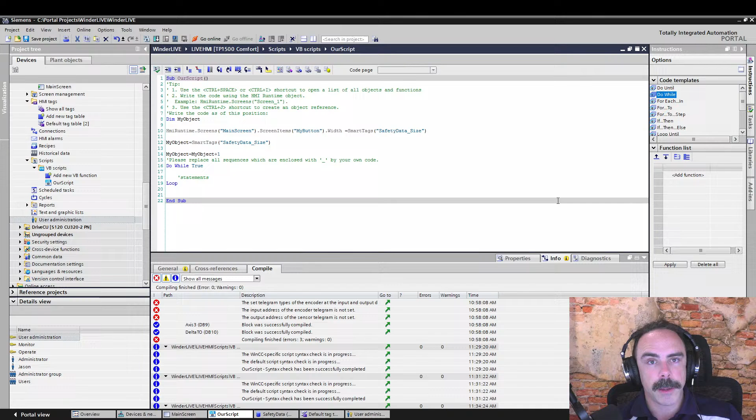and you log in and say, all right, here's this tag. I'm logged in as a user admin. I'm setting up this tag as this person, and it goes through and does it all dynamically, because you can actually do all of that from scripting, and it's pretty cool. Because if I remember correctly, there is a create user or something. I'd have to find it, but there's like user administration dot whatever, but there's a lot of stuff that you can actually do dynamically through this scripting, and I think that'd probably be a good next session.

So yeah, this has been a little bit of a shorter stream, and we talked about some really deep stuff in the first hour, and then got this introduction to HMI scripting. And so I'm sure that for those of you that are involved in these crazy drive projects, that first part is really helpful. 99.9% of people, you're probably not going to really use it.